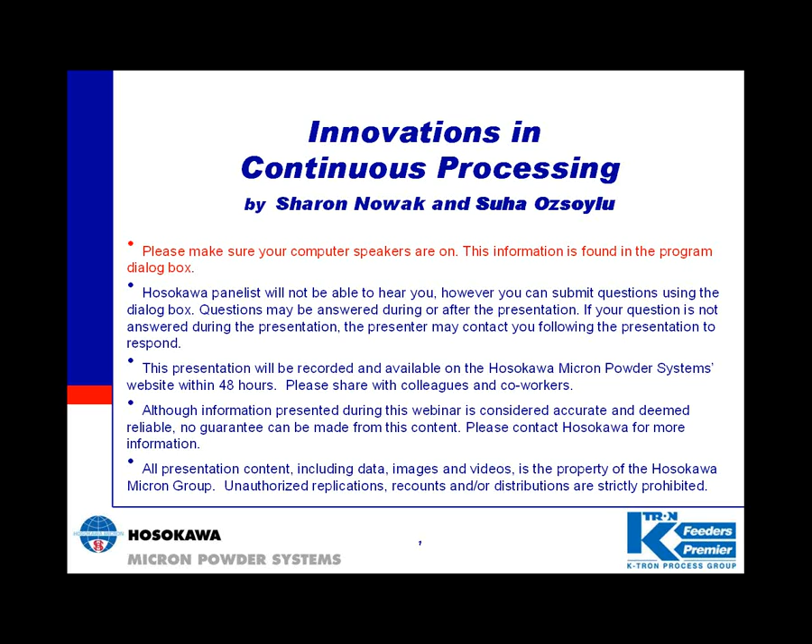Hosokawa Micron Powder Systems is a division of Hosokawa Micron Group with headquarters in Osaka, Japan. We are the global leader in powder processing equipment with over 1,500 employees worldwide, production facilities in 5 countries, and 12 research facilities and state-of-the-art test centers.

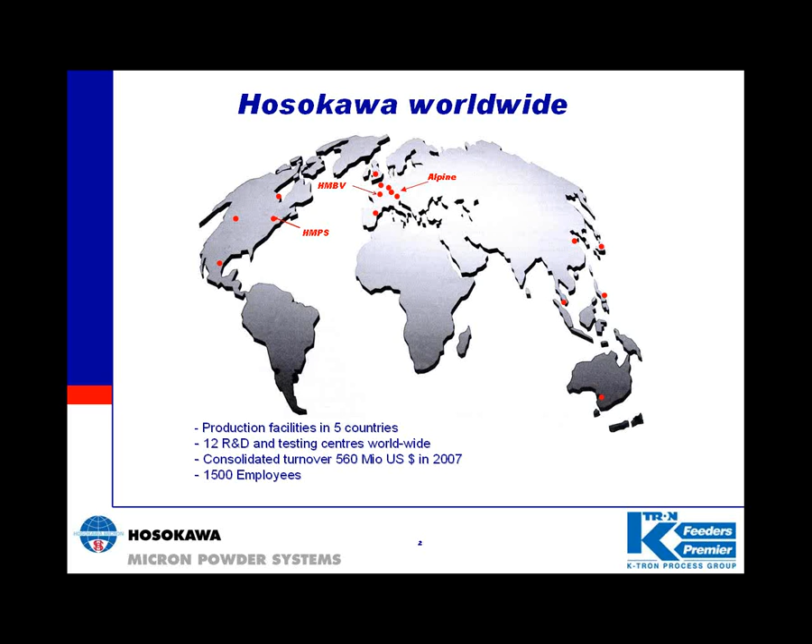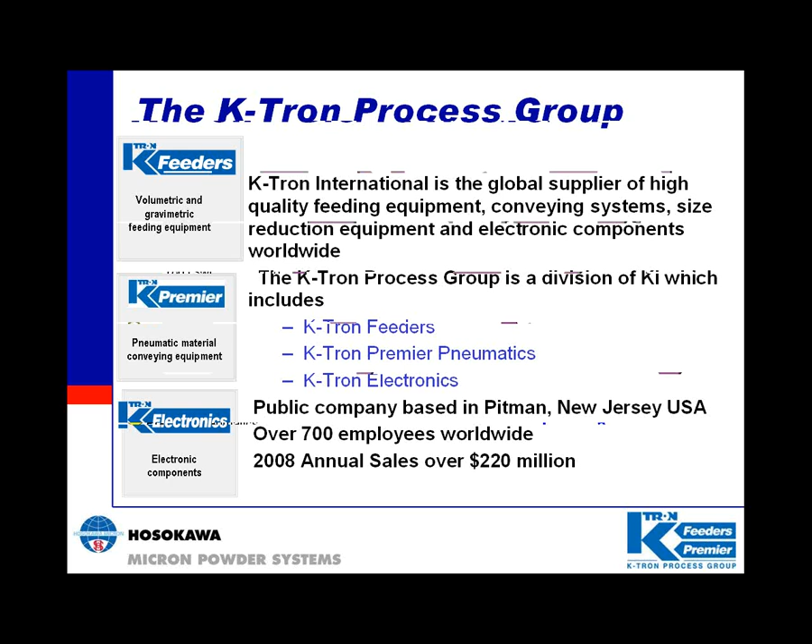K-Tron's global network consists of several manufacturing and design locations, including those in Salina, Kansas, Pitman, New Jersey, Netherlands, Switzerland, and its newest acquisition in Wuxi, China. In addition, K-Tron includes several direct global sales offices, including those in France, Germany, Great Britain, and Singapore. K-Tron is represented by an extensive global manufacturing network, including more than 80 representatives in over 62 countries worldwide.

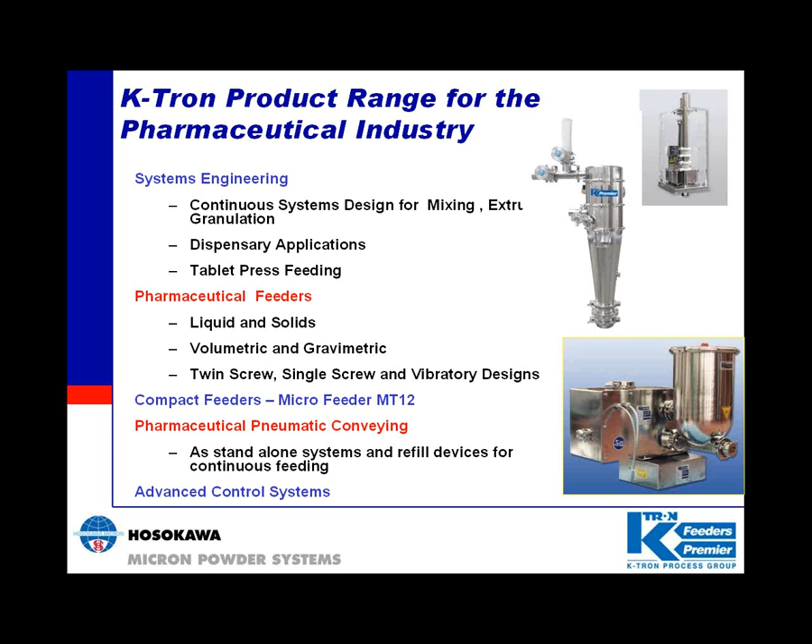The varied divisions of the K-Tron Process Group are responsible for several types of equipment suitable for the pharmaceutical industry. This equipment includes the specialized K-Tron feeders and highly accurate patented weighing systems, which we will discuss in detail today. In addition to the feeder line, K-Tron manufactures pneumatic conveying equipment suitable for the consistent refill of these continuous systems. K-Tron's in-house systems engineering group is able to provide completely integrated systems and controls for a wide variety of pharmaceutical operations. And now Suha will begin the technical content of this seminar.

I would like to start our discussion with a review of a basic tableting operation. There are 2 distinct approaches to this process, which are wet and dry granulation leading up to tableting. Although we will only review the dry process, the concept developed is equally applicable to both.

As can be seen from the components associated with the dry process, this is a batch operation, in large part due to the blending steps where bin and V blenders seem to be the norm. If we were to quickly trace the process, the first step would be to blend the primary ingredients, excipient and the API, which is a batch operation.

After this, the blend goes through compaction and dry granulation stage, typically to minimize the fines and improve the flowability characteristics, at which point lubricant will be introduced, again a batch operation, leading up to the tablet process.

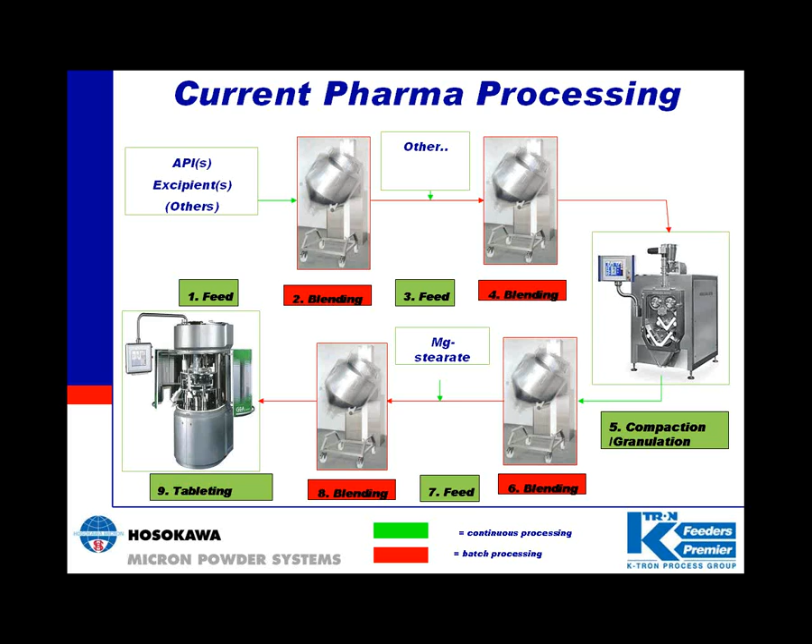Now that we've outlined the basic flow, we can look at the challenges associated with the batch nature of the process. We will look first at the material handling aspect.

When there are multiple starts and stops, and with connecting and disconnecting devices, the chances of product contamination increases significantly. For potent mixtures, there is an additional concern of exposing operators to the product. Switching to a continuous process eliminates all the make or break points associated with material transfer and sampling,

hence isolating the process from its surroundings. The next major concern is the size of the equipment. Depending on the batch sizes, the vessels that need to contain these amounts get larger, creating logistical issues as well as cleaning problems. Again, with continuous process, the equipment size does not need to change in order to handle larger

capacities. All that is required is to run the existing system for a longer period of time. As with any validated process, when moving from development to pilot or production scale equipment, there will always be concerns with scale-up issues. When the physical size of equipment changes to handle larger scale production, there are always concerns in making sure that the same end product can be achieved with the calculated scale-up parameters.

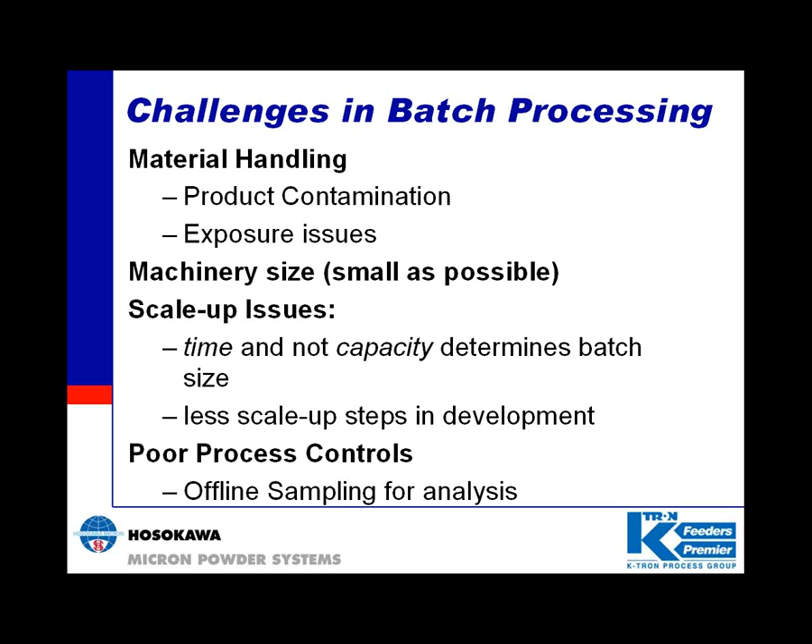Continuous mixing technology has been developed to overcome some of the shortcomings of the batch mixing steps. There are several different technologies that have been introduced to provide a continuous blending operation, but they all go about it in a slightly different manner. As with any technology, each has its advantages depending on the application. The number of ingredients, the proportions, and the material properties will play a great role in making the decision with regards to the suitability of each technology.

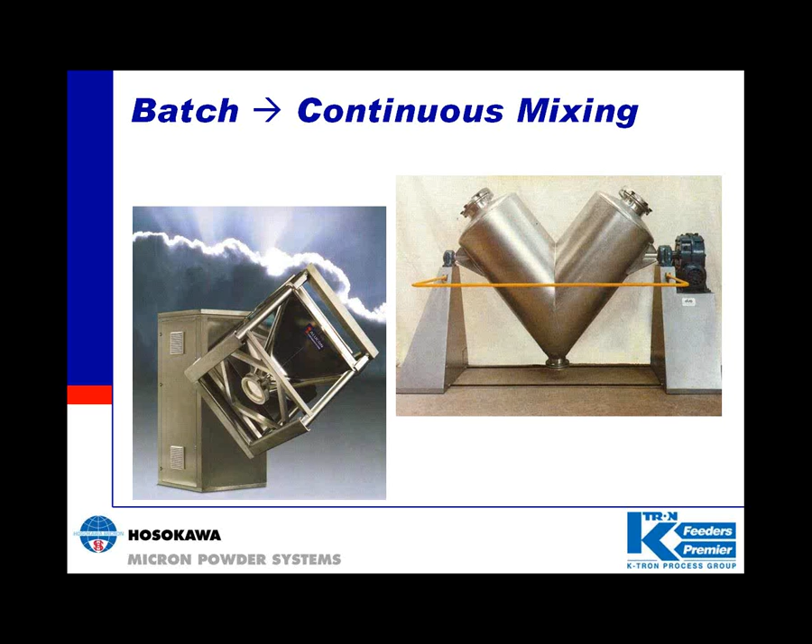Although there are empirical methods for estimating the performance of these units, testing still is probably the best means of determining the right equipment selection.

What are some of the key elements in determining the best equipment for your application? Certainly, with pharmaceutical applications, cleaning needs to be considered. Additionally, the responsiveness of the system is another key factor. If inline analysis indicates a deviation, how quickly will your system respond to correcting itself?

What is the residence time of the material in the system, and what is the significance of residence time? What are the expected startup and shutdown losses? How flexible is the process? These are some of the questions that need to be asked as we delve into this technology.

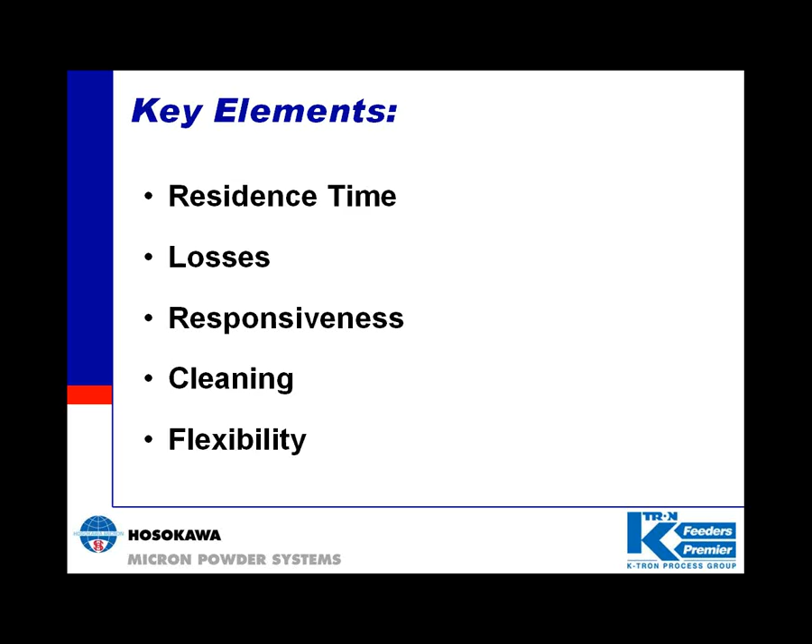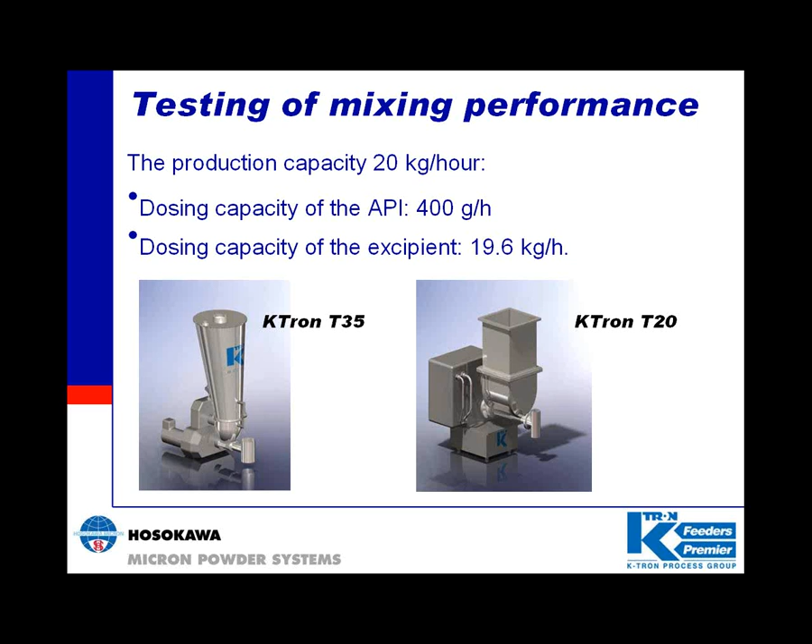To get a better understanding of this process, we can look at a basic example where one excipient is being mixed with an API. With an overall required feed rate of 20 kilograms an hour, the API fraction feed rate is 400 grams an hour, which is about 2% of the total. The remaining balance of 19.6 kilograms an hour is, in this case, the excipient.

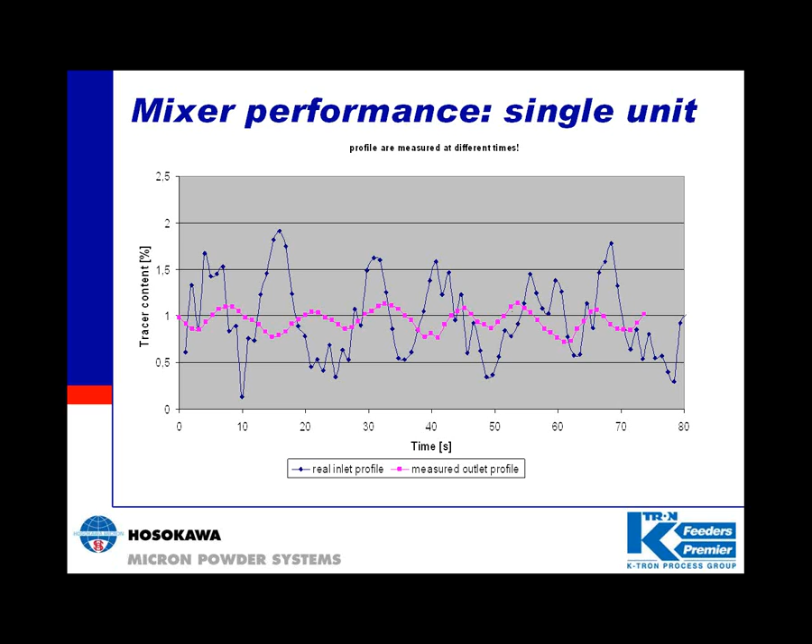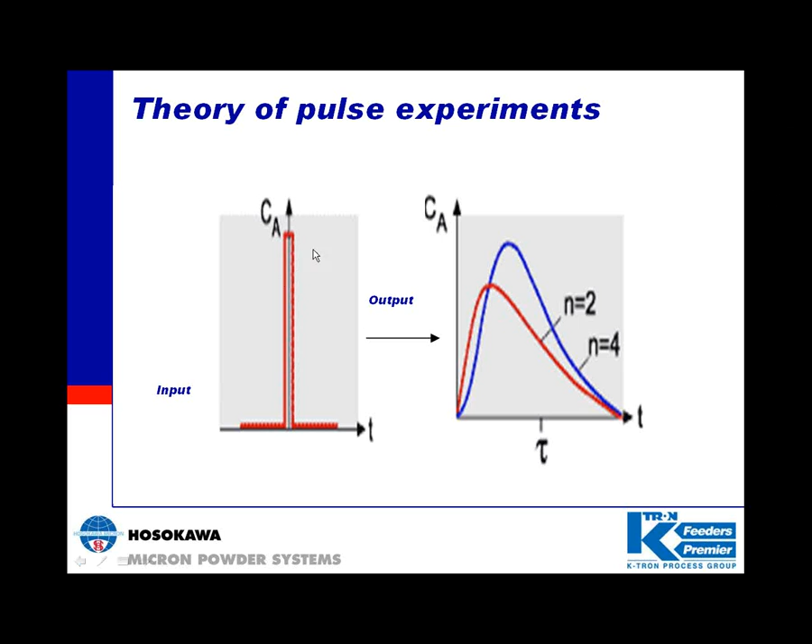To understand this phenomenon and also be able to model our continuous mixer, which will further allow us to predict the performance of the equipment, we will look at a tracer pulse experiment. As can be found in the general textbooks on reactor engineering, the response of a pulse-wise added dye in the entrance of a plug flow, including axial dispersion, will result in the following type of concentration profile at the outlet of the reactor. Here you can see clearly this is a pulse, a signal that's being sent, and this is at the outlet how the distribution has changed.

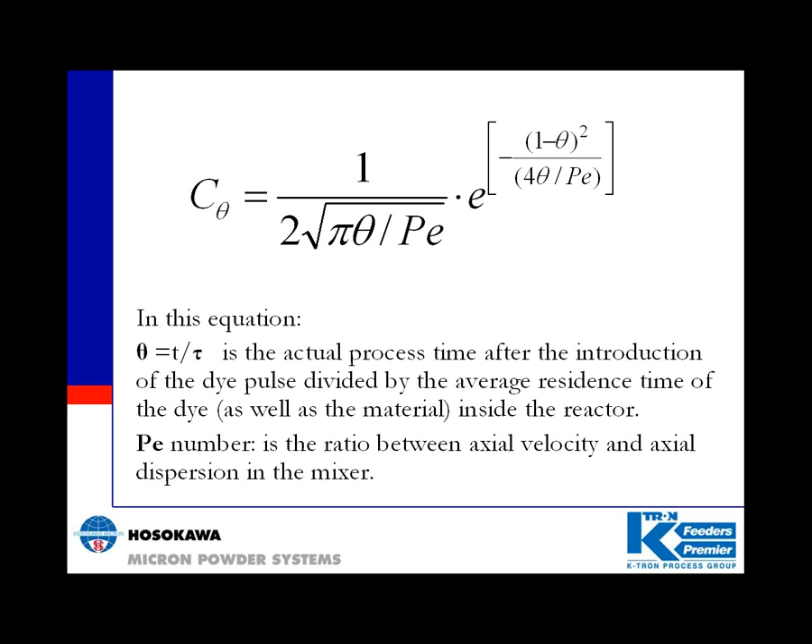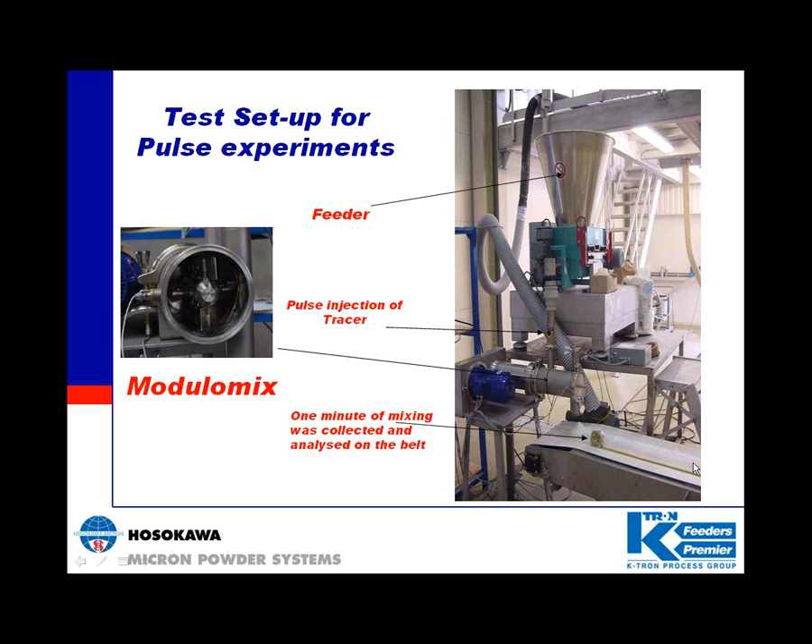A belt conveyor has been placed on the discharge of the mixer to capture and evaluate the material. This gave us the capability of evaluating the output of the mixer over a given period of time. You can see the belt conveyor here and the material that's collected on it, which gave us the capability of looking at it so that we could do a time graph of this.

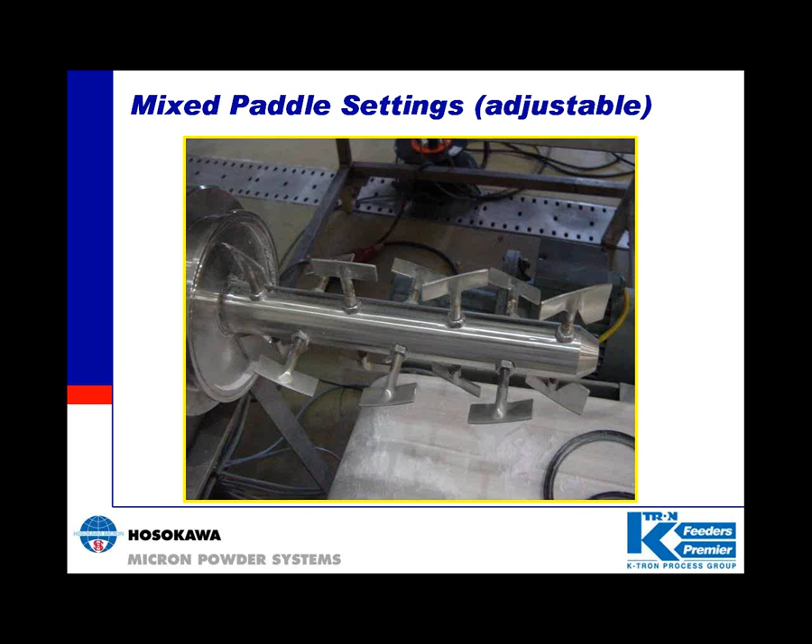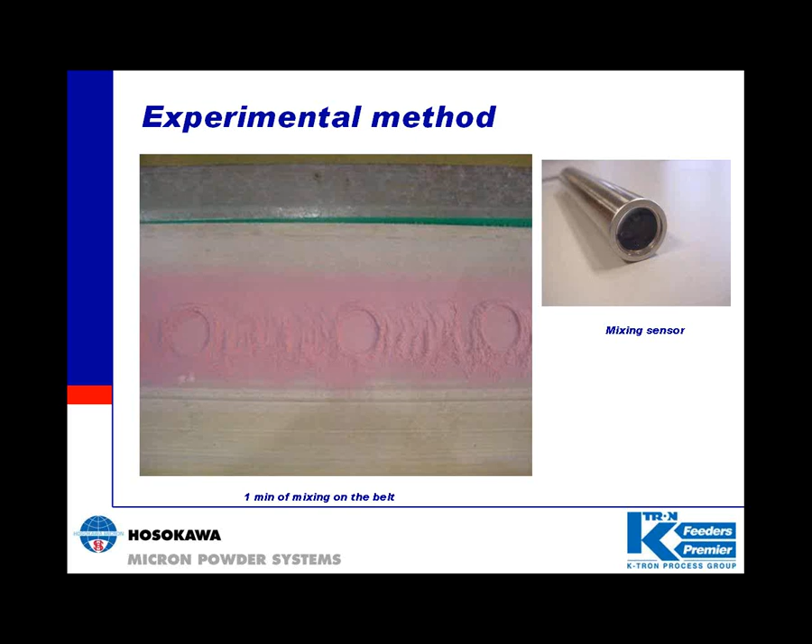This will allow us to predict the performance of our mixer, hence make the required adjustments to achieve the best possible performance for a given set of input conditions.

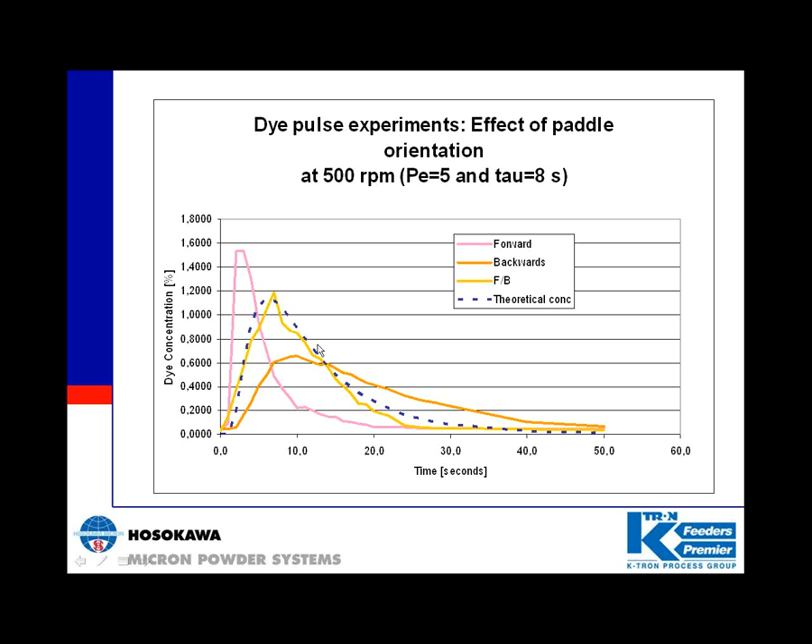In here you can clearly see the pink line, which shows the all forward paddle positions, while the orange one shows all backwards, and the yellow one showing mixed paddle positions, which is correlating very well with the empirical formula.

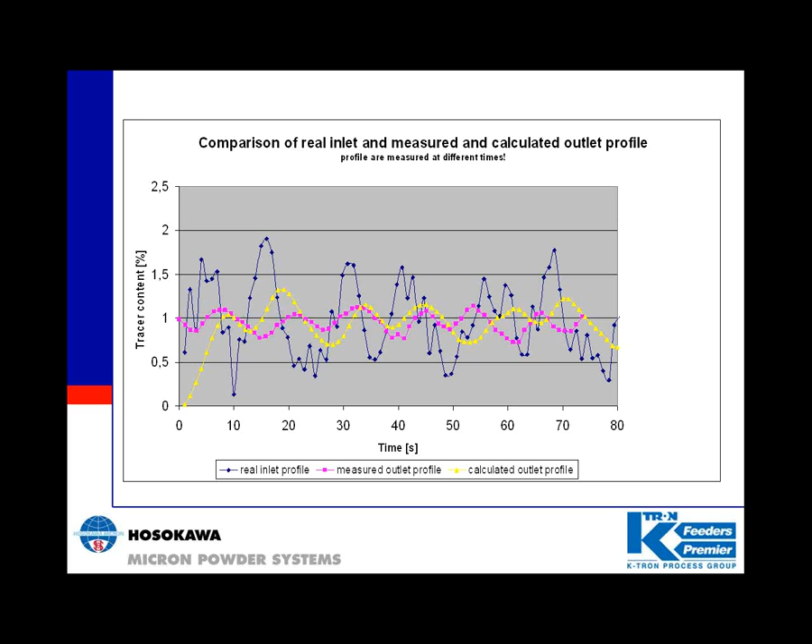To achieve the optimal performance, a mixture of the paddle positions are utilized. The optimal paddle position, while getting the best performance from the mixer, also needs to address operational concerns like moving the material away from the feed end shaft seals and directing the mixture to the outlet. Keeping the residue to a minimum in the mixer is another major concern that is tied to the paddle design.

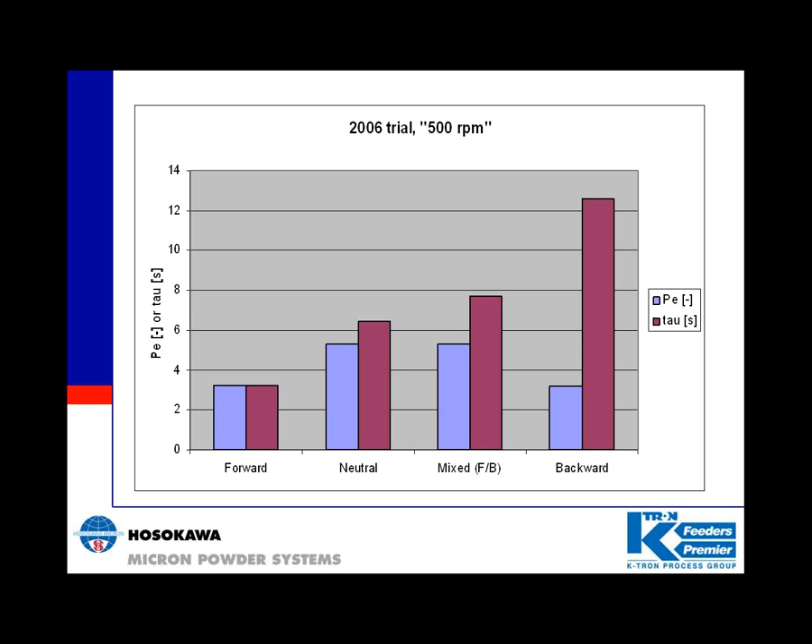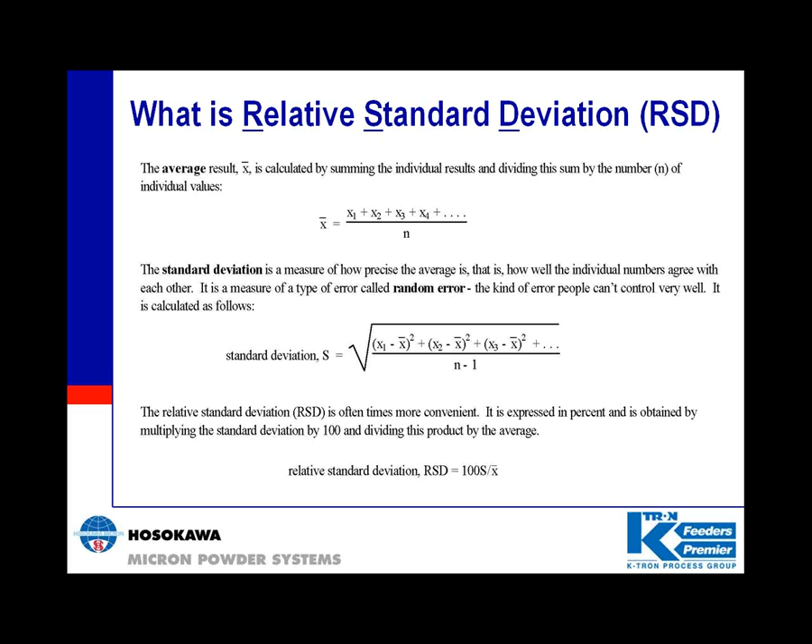I would like to introduce a new term, RSD, which stands for Relative Standard Deviation. This term, which is expressed as a percentage, is a measure for random error. My co-host Sharon will talk more in depth about this term later in this presentation, since this is a term most often utilized in describing the expected performance of the feeders.

Just to clarify further, there are unavoidable variations in the feeder output, which increases with reduced feed rates. Our goal is to smooth out these variations by dispersing the ingredients effectively. This effect is what we're graphing as RSD reduction, which will essentially guarantee the required dosage of the API making into each tablet.

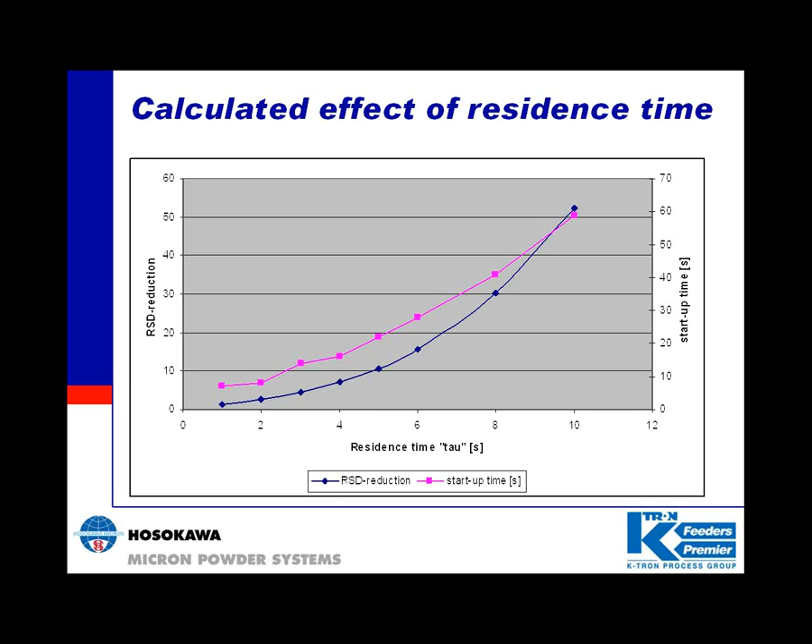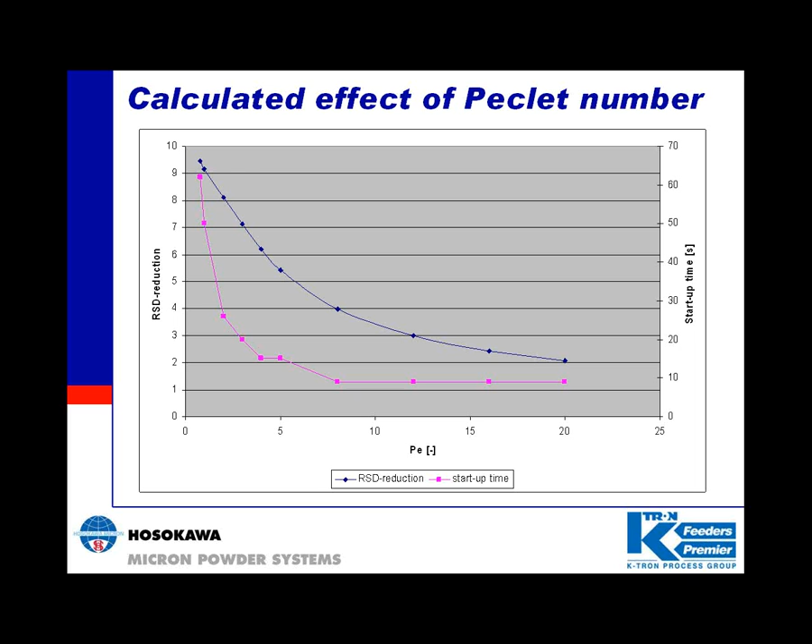As mentioned earlier, there are several different continuous mixers available. The Modulomix is one such mixer which combines an annular mixing profile and a modular concept. The theory is certainly not new. It is based on an existing batch mixer, the Cyclomix, which has been around for the last decade and used successfully in many different processes. The concept that has differentiated the Cyclomix from other conical mixers has been the ability to reduce mixing time significantly while maintaining high mixing accuracies. Taking its cue from the success of this concept, the batch mixer was converted to continuous, which has given birth to the Modulomix.

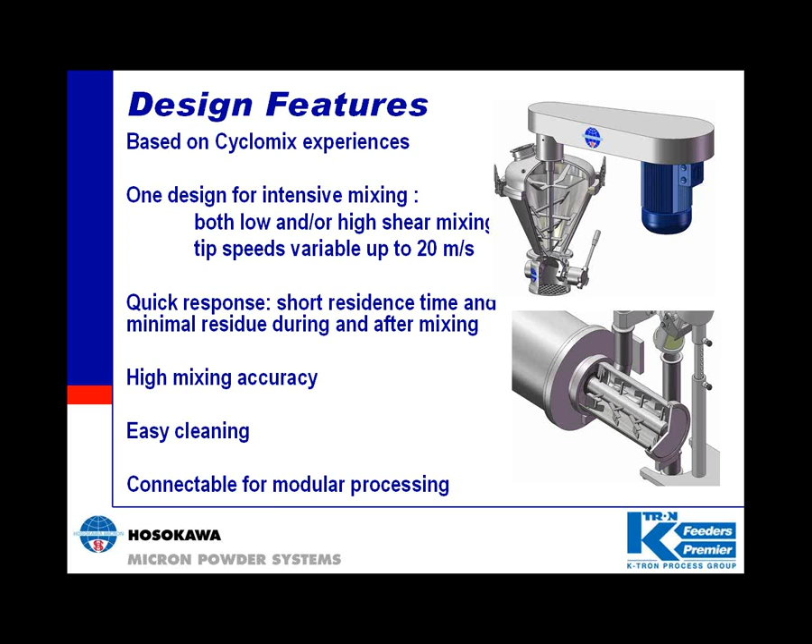This unit has a unique annular mixing profile where the material stays between the rotor and the housing. This minimizes the amount of material in the chamber at any given time, making this unit very responsive. The rotor speed is variable, allowing for high-intensity mixing at 20 meters per second tip speed, as well as gentle mixing around 2 meters per second. With this unit, very accurate mixing can be achieved in very short periods of time. Also, the compact size of the units makes them extremely suitable for cleaning and hence the pharmaceutical industry.

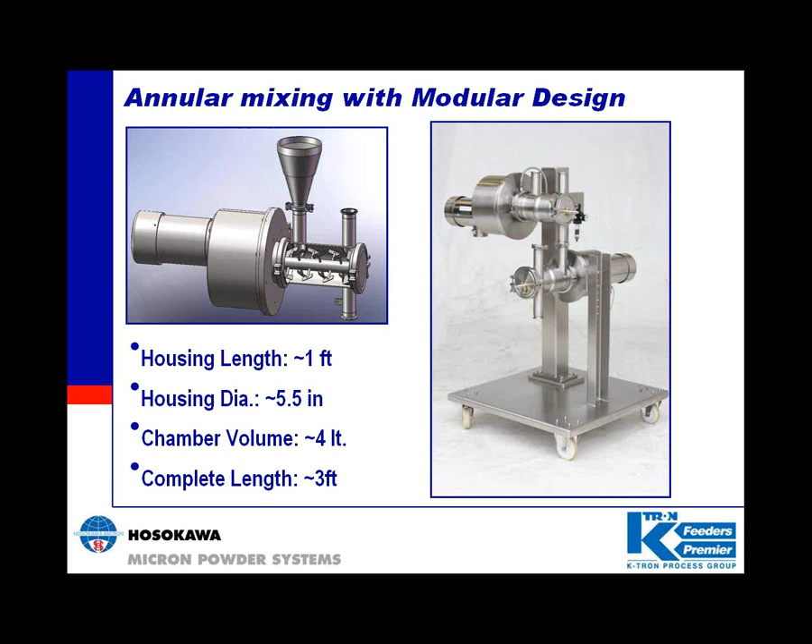These units can be stacked in series to allow for extended residence time if required, but more importantly, it will allow for two or more separate mixing intensities. With a typical API excipient blend, which requires high energy mixing, while the lubricant requires low intensity and gentle handling, this unit can accomplish both tasks with ease.

The inlets placed on both ends of the unit are tangential to allow the main ingredient to enter the first unit, while the inlet on the tail of the chamber is used to feed the lubricant into the second chamber. The excipient and API would be brought in from this primary inlet port, and the lubricant could be introduced on the secondary inlet port, which feeds directly to the second mixer down below, which has a lower rotor speed for less intense mixing.

This compact size unit can handle rates from 20 kilograms an hour up to 150 kilograms an hour, which would cover feeding almost any tableting operation.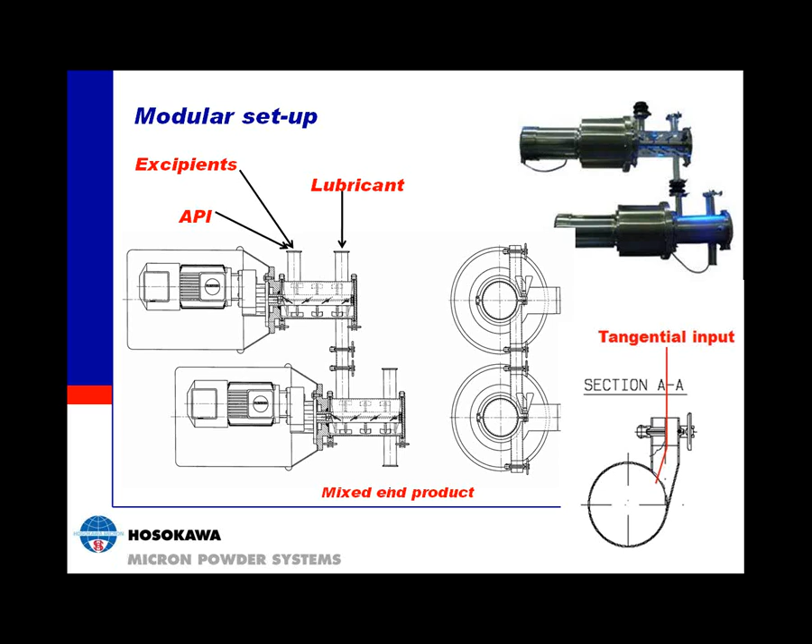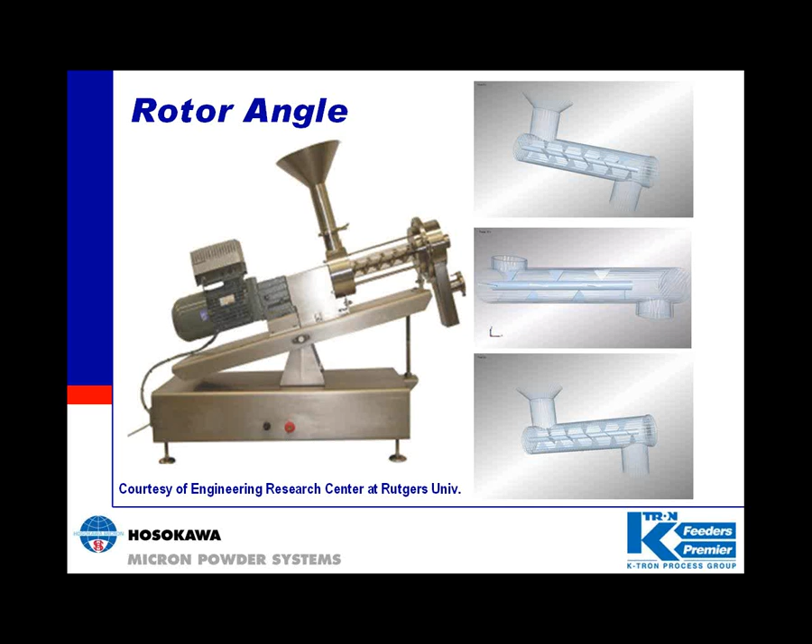In this slide, we can see a slightly different design where the feed forms a bed within the chamber, almost like a screw conveyor. Since this is a single chamber unit, it employs a tilting mechanism to allow for additional control over residence time of the product in the mixing zone. This unit is similar to the others with adjustable speed rotor, but lacks the flexibility of varying intensities in a single train.

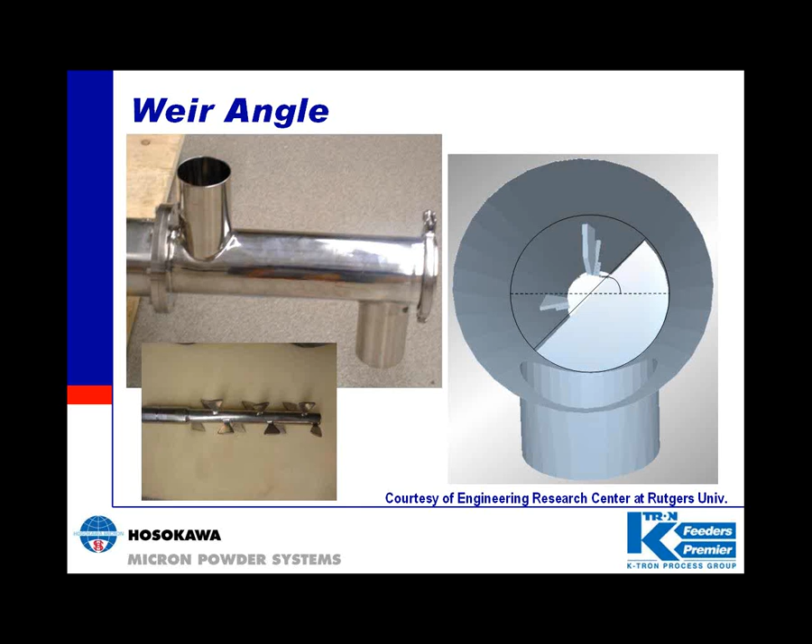This concludes my portion of the presentation. I hope you found the information today informative, and I thank you for your attention.

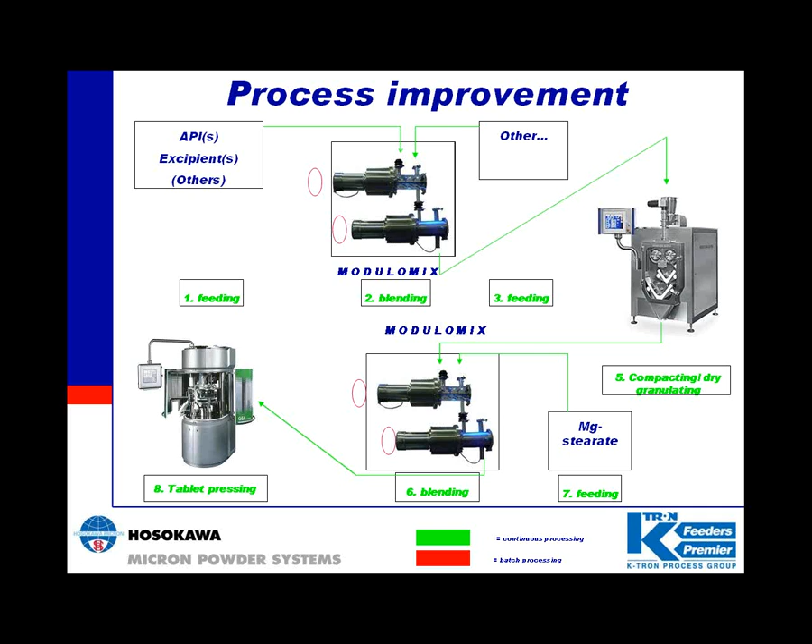Thank you, Suha. This portion of the seminar will focus on the role of gravimetric feeders for continuous processes, as well as educate the attendee on the necessary information required for the proper design and overall integration.

In the continuous process, the feeder chosen can not only affect the overall throughput of the process, but also the process end quality. In order to properly choose the right technology, it is critical to evaluate the material characteristics which affect the flowability of the material, the measured accuracy of the feed technology chosen, as well as the operational requirements of the feeder, such as cleanability, ease of maintenance, containment options, overall size, and controls and data acquisition.

In continuous processing, the end process is often referred to as being a slave to the feeder or feeders. Feeding devices are used to set the overall throughput and flow rates of the process downstream.

In some cases, a pre-blend of the excipients and API are introduced continuously in one feeder, with the lubricant usually introduced towards the end of the mixing stream, as shown in one of Suha's slides.

However, in ideal continuous processes, each ingredient in the formulation is introduced by a separate feeder, based upon the percentage of each component in the mix. Due to this configuration, the overall accuracy of the formulation is highly dependent upon the accuracy of the feeder's delivery.

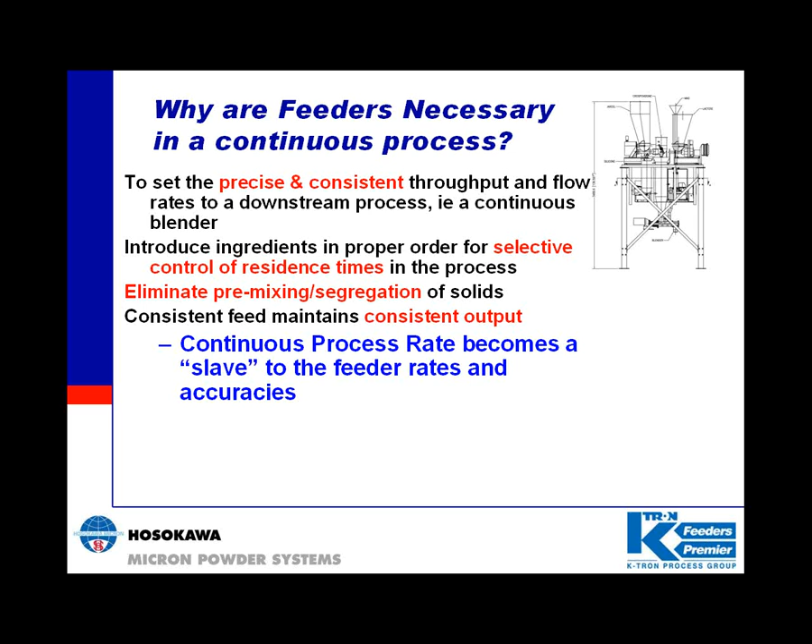For example, bulk density will not only help to determine the proper volumetric flow of the powder, but also the volume of the refill hopper required to ensure constant flow.

Particle size and morphology is also critical to overall flowability. A very free-flowing material is typically spherical in shape. Most APIs, however, are actually needle-shaped or include what is known as a high aspect ratio, the ratio of particle length to width. These needle-shaped particles tend to build up on one another instead of flowing easily over one another, like that of a spherical particle. This contributes to poor flowability.

One of the easiest ways to assess an API is to simply look at it under a microscope. Chances are it's needle in shape and poor flowing.

The properties of all the characteristics listed here aid in the classifications of materials into one of four categories: floodable, free-flowing, difficult to flow, and cohesive or sticky.

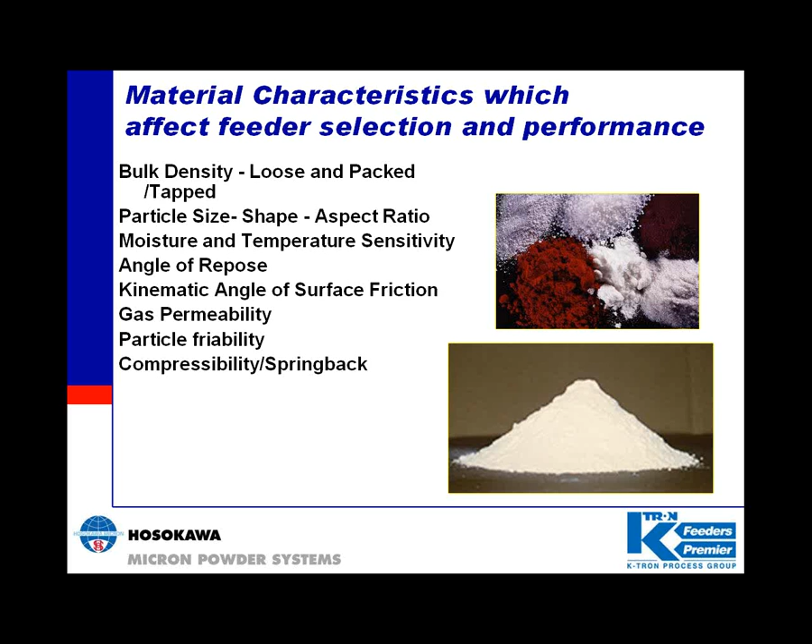Repeatability reports how consistent the feeder's discharge rate is at a given operating point, while linearity assesses how accurately the feeder discharges at the requested average rate over its full operating range, and stability gauges performance drift over time.

Repeatability is a performance statistic most familiar to feeder users. It quantifies the short-term level of consistency of discharge rate, and this is where it ties into the relative standard deviation that Suha discussed earlier.

The repeatability measurement is made by taking a series of carefully timed consecutive catch samples from the discharge stream of the feeder, weighing them, and then calculating the plus or minus standard deviation of the sample weights expressed as a percentage of the mean weight of the samples taken.

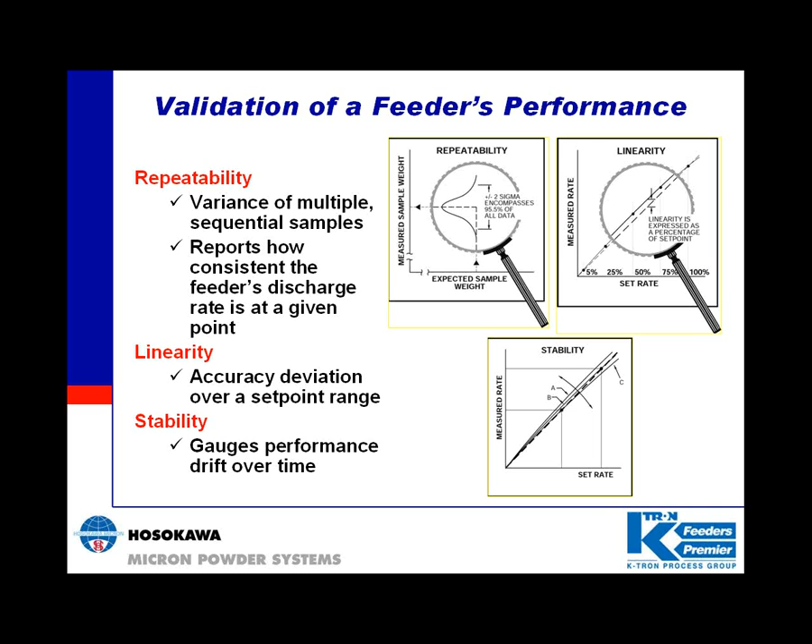Suha previously explained standard deviation as a deviation from the average. Traditionally, repeatability has been expressed at 2 standard deviations, or 2 sigma, over a set amount of time intervals. Due to increasing demands of downstream processing and end quality standards, manufacturers are now specifying repeatability up to 6 sigma for sampling periods as low as 15, 5, or even second-to-second time frames.

The graph on the top right illustrates a typical standard deviation curve, with 1 sigma at 68.3% of the sample, and 3 sigma up to 99.7% of the sample.

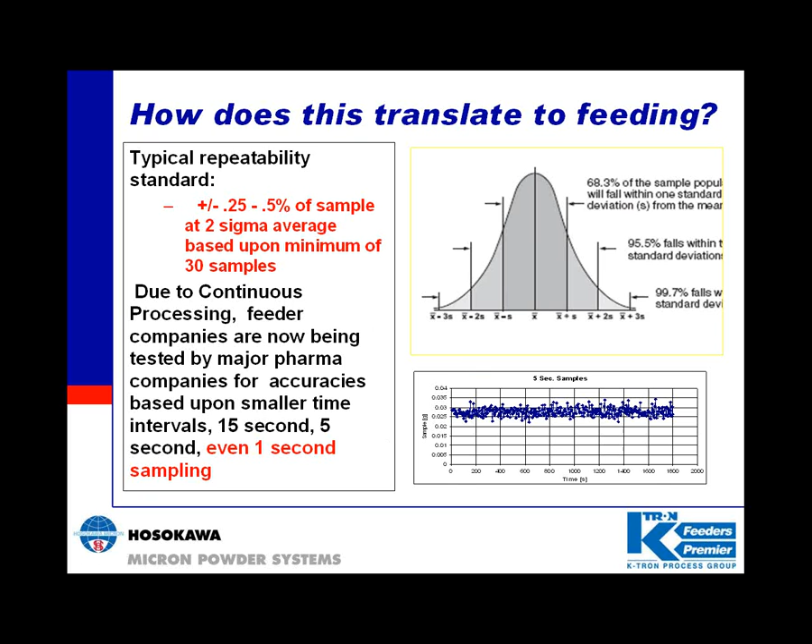Typically, the repeatability standards expected from a gravimetric feeder are 0.25 to 0.5% of the set point, whereas with a volumetric feeder, as shown in the graph Suha presented, the variations can range anywhere from 1 to 6%. The graph on the bottom shows a typical output graph of a feeder as a function of weight versus time, shown over an extended period but taken in 5-second intervals.

Factors affecting accuracy include feeder selection and sizing, weighing resolution, control responsiveness, and environmental dynamics such as vibration and shock.

The most common types of feeders used for pharmaceutical continuous processes are screw feeders. Screw feeders, as shown in the picture, are available in both volumetric and gravimetric configurations, and typically in both twin and single screw designs. The diameter of the feed screw affects delivery - this shows a twin screw design with 2 screws. For example, at a given rate, a smaller diameter feed screw will rotate faster than a larger diameter one.

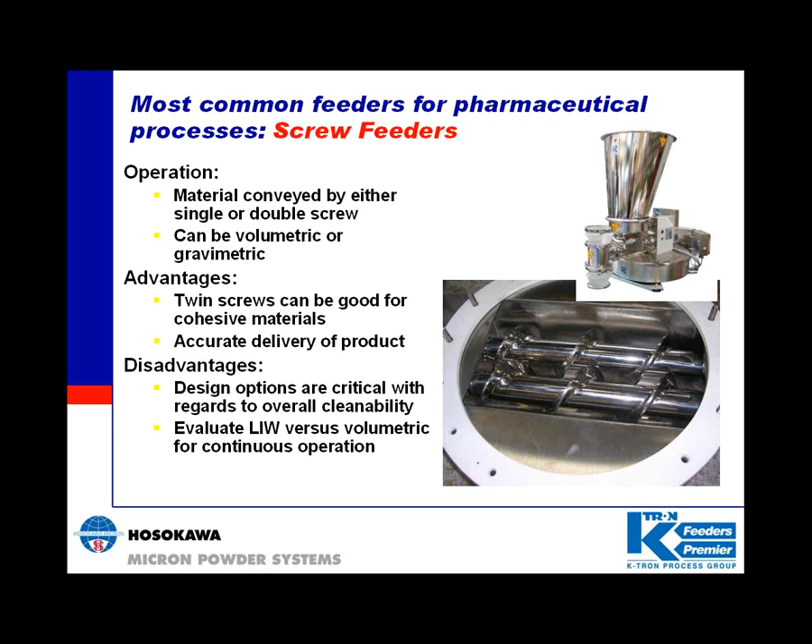Single or twin screw feeders represent the most versatile feed technology for bulk solids. Given the material characteristics, a suitable screw configuration is made for the required rate. Single screw feeders, shown in the top photo, are often used for higher volume applications and are ideal for free-flowing, non-cohesive materials. However, typical problems encountered with a single screw include material being flung off the screw flights.

Material can stick to the screw tube wall, causing buildup that then falls off into clumps. This defeats the purpose of having a metered screw or metered feed delivery in the first place.

For this reason, twin screws, shown in the bottom photo, are often used for most cohesive powders. The twin screws are co-rotating and have a self-wiping effect, so material can be conveyed along the screw tube, preventing the typical buildup problems encountered with single screw designs. By employing 2 self-wiping closed flight screws intermeshed side by side, sealed pockets are formed to capture and transport both hard-to-flow materials and floodable materials.

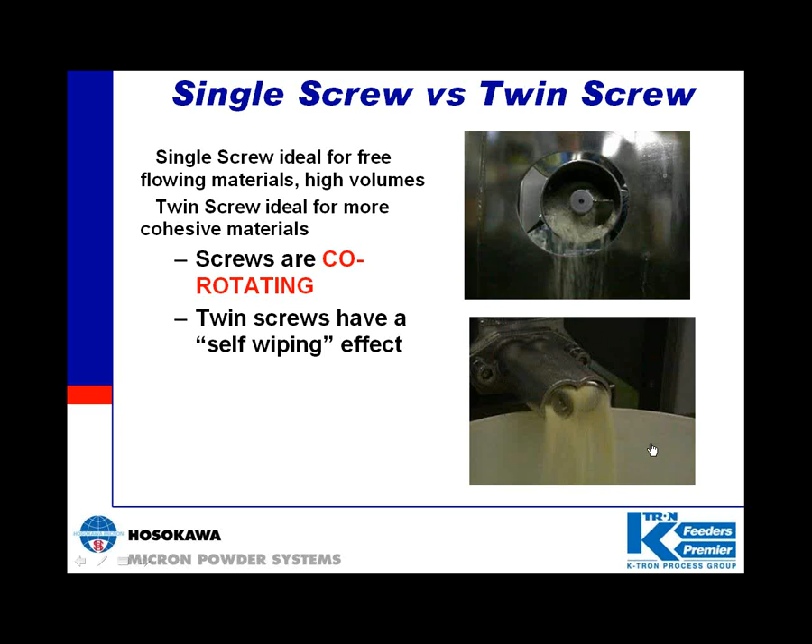Single and twin screw configurations are typically available in a variety of designs which differ in screw pitch and flight. As shown in the chart, this is an example of some of the different configurations available, changing both the pitch and the number of configurations or screw flights in the screw itself.

The difference in screw configuration will not only affect how material flows in the feeder, but will also affect how much material is delivered per screw revolution to the process below. So it's important to choose the proper screw configuration for the material you're using.

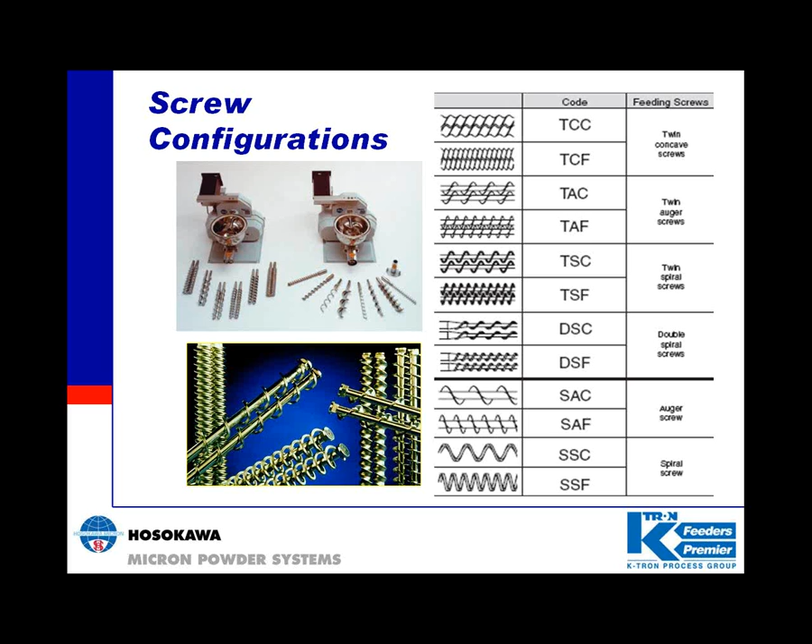This graph, provided by the ERC on continuous processing from actual continuous feeding trials at Rutgers University, illustrates several different screw configurations on a twin screw feeder for Avicel. Screw configurations were all tested both with and without a screen at the screw feeder discharge.

The use of a screen serves not only to help disperse the material after it exits the screw feeder, but also helps produce back pressure on the feeder, aiding overall screw fill and consistency. As shown in the graph, feeder performance and accuracy can be affected based upon the screw configuration used, but also in relation to the overall screw speed utilized.

This shows the relative standard deviation of the feed rate, and this shows the percentage of screw feed used in the total range of the screw feeder. These give the different configurations of screens versus type of screws used, and you can see the variations differ significantly depending upon the configuration you use. This just shows you how important it is that the proper screw configuration be utilized to ensure the most efficient means of conveying the material.

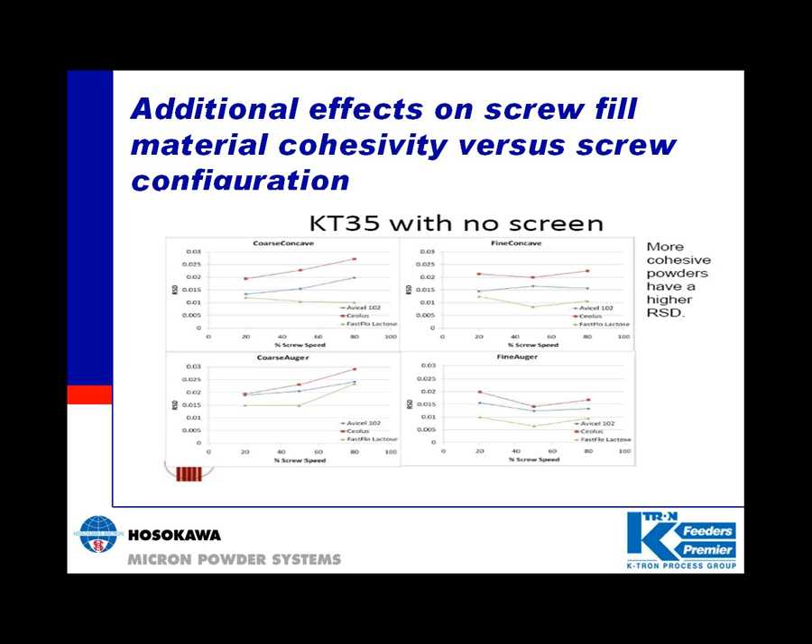As the feeder discharges material, the system weight declines. The speed of the metering device is controlled to result in a per unit time loss of system weight equal to the desired feed rate.

Volumetric feeders, however, operate by delivering a certain volume of material per unit time. The bulk material is discharged from the hopper by regulating the speed of the feeding device. The actual volume of material fed depends on the uniformity of the material flow characteristics and the bulk density. Most important, volumetric feeders do not control mass flow, which is critical for continuous processes. This is one of the main reasons you saw variations in feed rate with the volumetric feeder on Suha's graph. The most popular type of gravimetric feeder used is the loss-in-weight feeder.

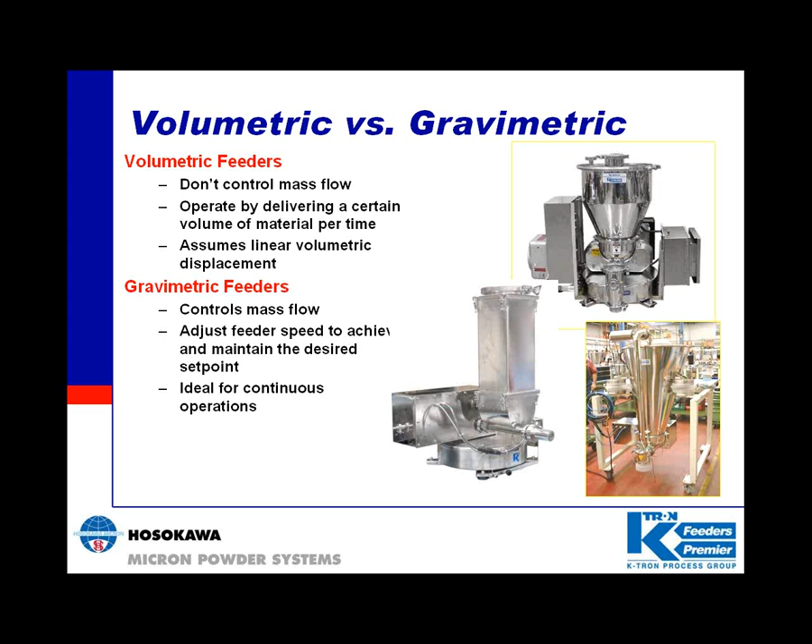If the material builds up or bridges in the hopper, the feeder will not know it, and it will just continue to perform as if it was started at the same speed you told it to. This means that at some point during the continuous process, you may reach a point where you're not feeding any material to the process, or feeding little or no material.

With a gravimetric feeder, as the feeder loses weight, the weight is measured by the load cells or scale, and a signal is sent to the controller to adjust the screw speed and maintain constant mass flow. In the case of varying head loads, when you have different bulk densities changing as the hopper weight declines, the load cells will detect the change and adjust the speed accordingly.

In addition, with the loss-in-weight device, if there is no flow occurring, there is no corresponding loss in weight on the load cells, and an alarm will sound. In more sophisticated feeder types, this signal can be sent to a vibrator located on the outside of the hopper, which will vibrate to cause the material to unbridge and flow again. Once the mass flow is back in line with the set point, the vibration can then be stopped.

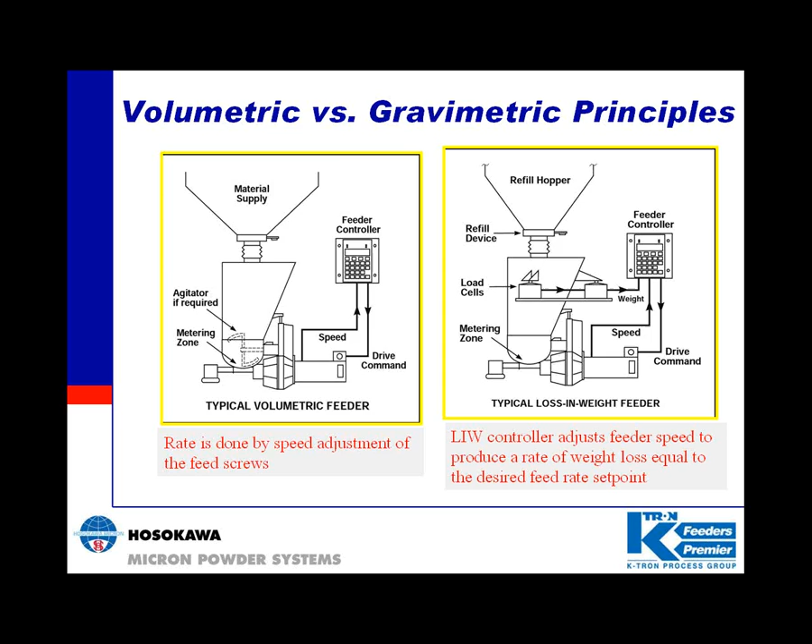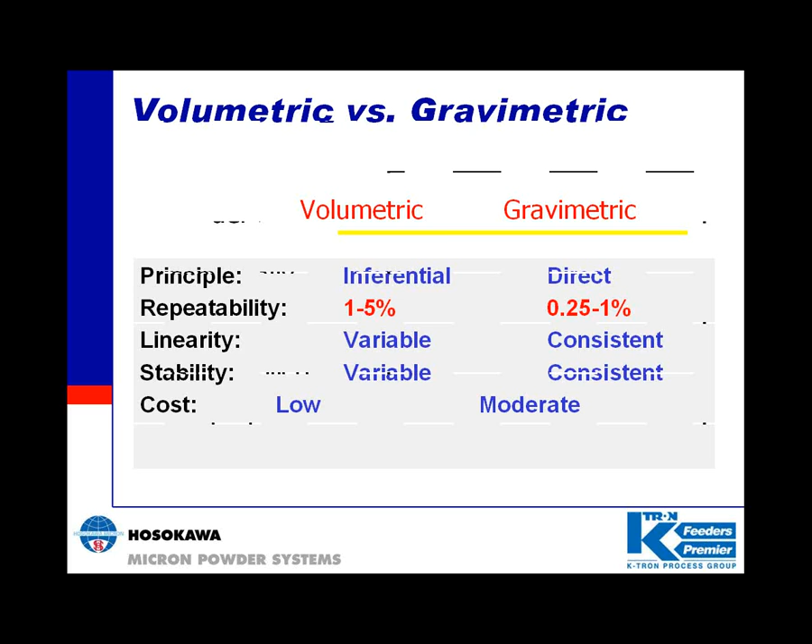As the feeding proceeds, the measured weight is continually compared against the set point line's target weight. Any difference between the two values, as it declines in weight, will trigger a change in the feeder speed from the controller. For example, if an overfeed condition occurs due to an abrupt increase in material density, the sensed weight falls below the desired set point weight, triggering a reduction in the screw speed to return to the set point value. The opposite occurs in an underfeed condition.

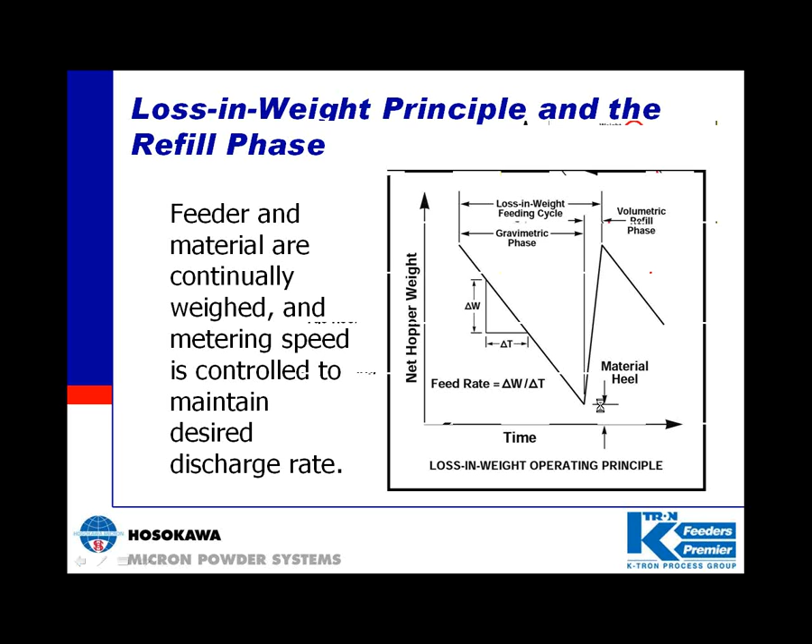Now, what happens when the feeder is at its lowest point, as it is here, for a refill? When the hopper reaches a predetermined minimum weight level, the hopper is automatically refilled. This portion of the feed cycle in the continuous process is critical in order to ensure overall flow consistency because the feeder is operating volumetrically. But how does the feeder know what speeds to operate at to maintain consistent product output as it's filling back up?

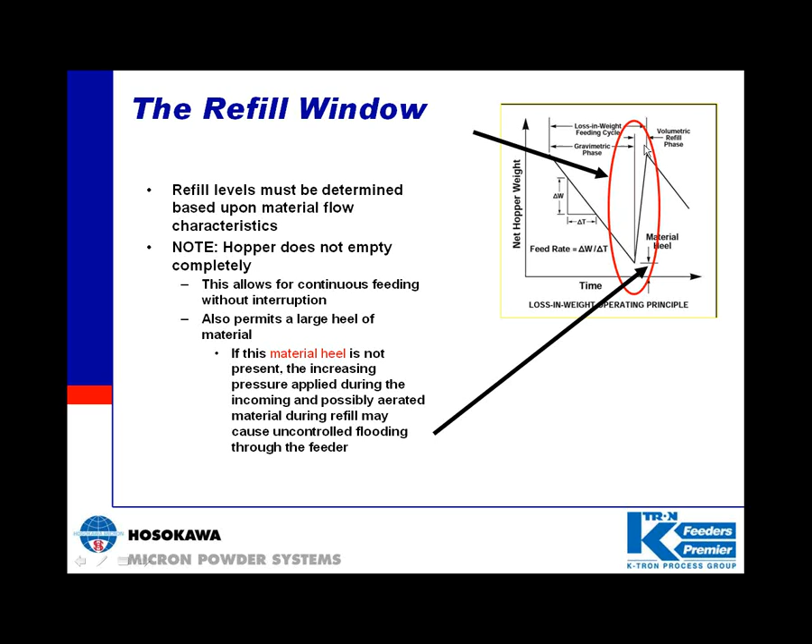The answer to consistent flow is in trending and collection of the data which is occurring during the feeder loss in weight. This is also known as feeder refill array. The refill array technique automatically adjusts the screw speed during the refill as the weight is increasing. During the refill cycle, the controller regulates the speed of the feeding device based upon the historic weight and speed information that was collected during the previous weight loss cycle.

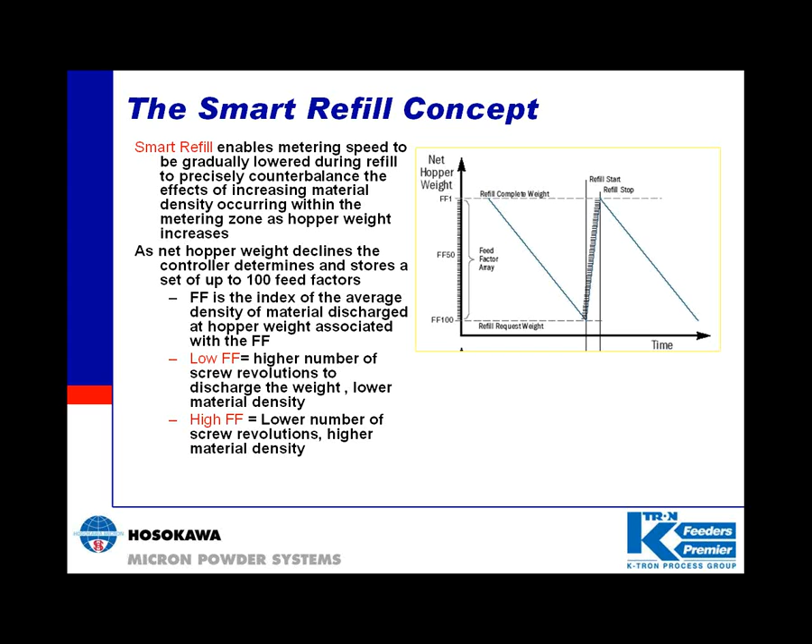The refill concept is especially important and most accurate when using a high-resolution, fast-responding weighing system. By maintaining the correlating screw speed, a consistent and constant delivery of the ingredient to the process can be achieved. The accuracy and performance of the refill array is critical to this overall accuracy.

However, even though the feeder is being trended with data to deliver the material to the process below, the feeder is still operating volumetrically. For this reason, it's critical that the overall amount of time which the feeder is in refill during the complete operation of the process be as short as possible in order to maximize the feeder performance. It is also imperative that whatever device is chosen for the refill, that the delivery of the product during the refill process be as quick as possible.

This slide shows several different choices as far as refill options on the type of refill device that can be utilized above the feeder hopper. Options include knife gates, modulating butterfly valves, rotary valves, or in the case where extreme control is required, such as in microfeeding of very low rates, the use of alternate meter devices such as volumetric screw feeders.

Pneumatic receivers, such as the device refilling the feeder in the photo here, operate under a dilute or a dense phase vacuum transfer principle, and are often used as refill devices. The pneumatic system utilizes negative pressure to suck the material required into the receiver, and then the receiver is filled to a determined level and then holds this material and is closed, isolated here by means of a butterfly valve, before the feeder below asks for a refill.

When the feeder below asks for a refill, the butterfly valve opens, the material falls into the hopper here, then the butterfly valve closes, and then the receiver is again charged for the next cycle.

One of the things to show on this slide here that's also critical in any type of refill device that you use with a loss in weight feeder are the use of bellows or flexible connectors between the feeder as well as the process below, mainly so that the scale can always accurately define exactly the load that's in the feeder itself and send the signal back to the motor and the controller.

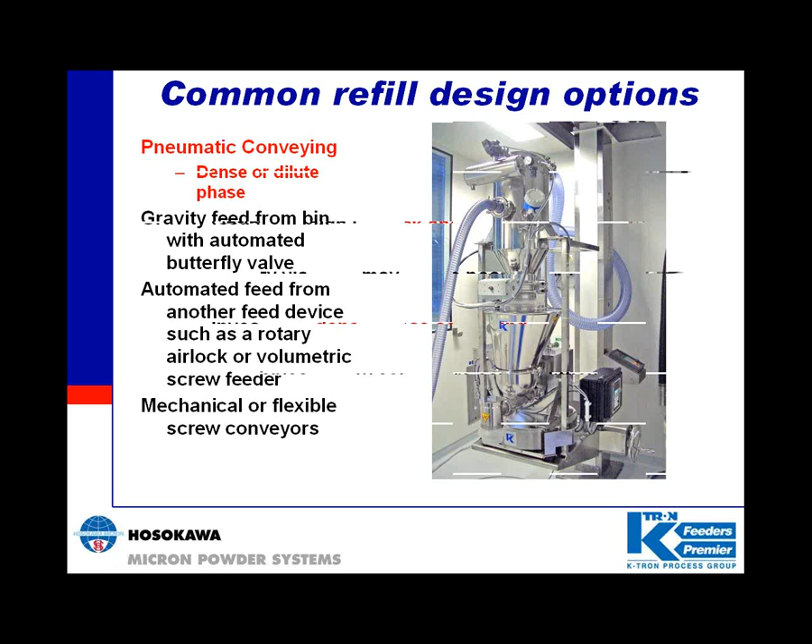When determining the best refill device for a continuous process, it is imperative that the flow rate from the refill device be sufficient to avoid exceeding the refill time limit. Additionally, the flow cutoff action of the selected device must be quick and sure. A slow tapering off of the refill flow lengthens the refill time, which will affect the amount of time you're in volumetric, which will also affect the overall accuracy of the system.

Any leakage of the refill device, such as sometimes with rotary valves, will actually cause an unavoidable unmeasurable weight disturbance. In addition, it is important to evaluate the overall space and height limitations which may exist for the refill device. For example, although gravity flow may be best from a segregation concern, there may not be enough height or space to deliver a variety of materials via several IBC bins to the feeder hopper. In this case, the use of a dense phase conveyor, which conveys the powder from bins on the floor to the receivers above, may be better suited.

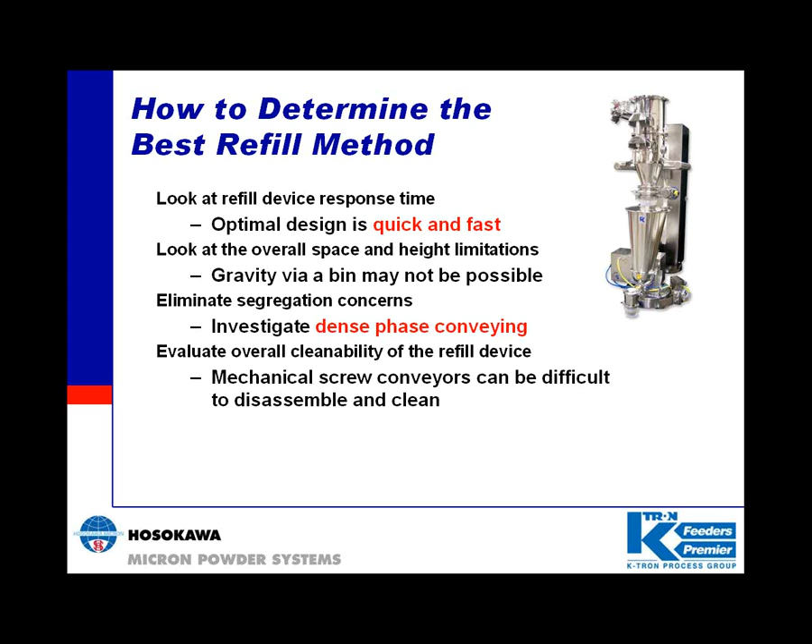In summary, all continuous processes require a variety of key design parameters which must be considered to ensure the consistent flow of material to the continuous process below. Material characteristics are critical to overall feeder selection as well as resultant feeder accuracy.

The use of single versus twin screw feeders or different screw configurations, as you can see from the previous slides, can greatly affect the feeder output. In addition, the design and choice of the proper refill device and the control system with a high accuracy and quick response refill array is critical to the overall performance. It is imperative that the design of the overall system not compromise the performance of the feeder, and that issues such as containment, isolation, and cleanability be thoroughly examined.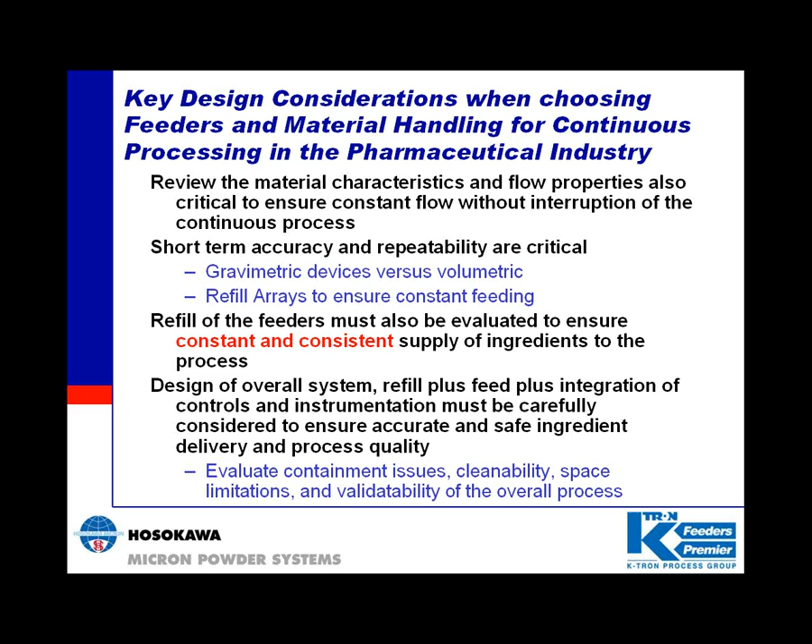Okay, next question from the same viewer: how does LIW feeder controls affect accuracy? Again, the same thing - not only utilizing, as I said in the presentation, a high accuracy load cell, but you also want a very fast-acting controller. When you're dealing with the short-term time measurements like you are in continuous processing requirements, as I said before, 5 seconds, second to second, you need a controller that is also taking measurements at a very fast pace. K-Tron's SFTs actually are capable of delivering that high resolution in 80 milliseconds.

The loss in weight controllers actually weigh 112 weighments every second. And this is especially important when you're dealing with low rate feeding, as Suha was talking about before. The lower the rate of feed, the higher the deviations in accuracy. So you want to make sure that the controller and the load cells you use are designed for the higher resolutions, especially at those lower rates, as well as the fact that you're taking as many measurements as possible in order to get the proper mass flow from the feeder.

Okay, next question: since the mixing process can be high intensity, are there any concerns with regards to temperature rise across these units?

This is a very good question. Obviously temperature rise is a critical issue, so we ran some tests on our Modulomix where we picked a very dense material and ran the unit at its highest speed, measuring the temperatures of the product coming out as well as the chamber itself. We saw a temperature rise of about 1 to 1.5 degrees centigrade, primarily because the material does not stay long enough in the chamber to pick up heat. So, short answer, there is really not much concern about temperature rise.